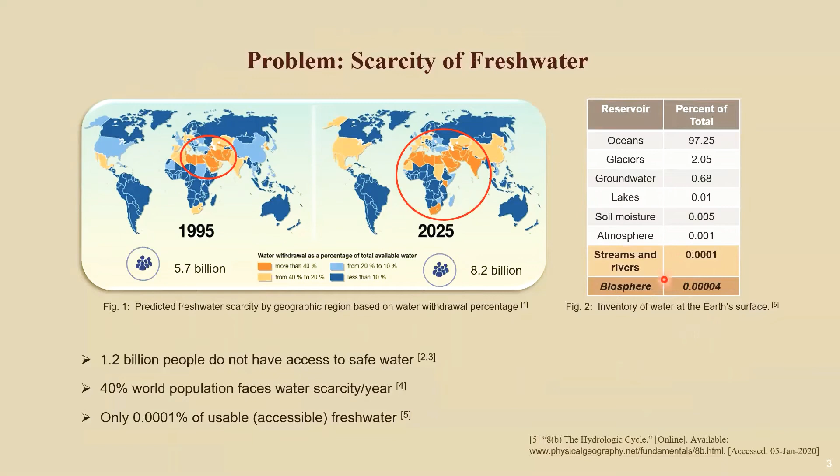Currently, 1.2 billion people do not have access to safe water. 40% of the world population faces water scarcity per year. The table on the right shows the inventory of water at Earth's surface, and a very tiny amount of total water is accessible to us for use.

Our focus in solving the water scarcity problem is to go off-grid. That means not connected to any supply water network system, especially for remote areas where people do not have access to safe water and the place is too far from developed areas to establish a water supply line.

So our first potential solution is the atmospheric water generator, or in short AWG. This is an off-grid source of water, free in the sense that the water generated by this device comes from the surrounding moisture in the air. This moisture comes from the biosphere due to evaporation in the water cycle. But this generation process can be energy intensive and inconsistent in nature due to variation in temperature and relative humidity in the atmosphere, as the amount of water production largely depends on these factors.

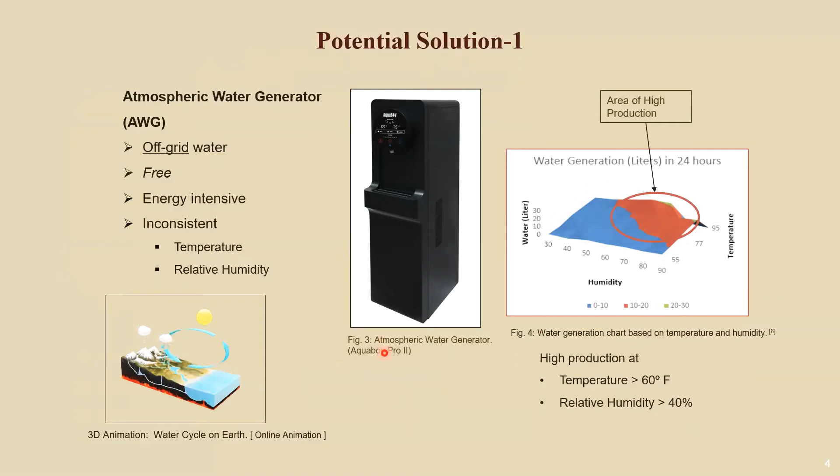The graph on the right shows this device can produce up to 30 liters of water when operated in the most favorable atmospheric condition. The most favorable condition is when temperature is above 60 degrees Fahrenheit and relative humidity is above 40%. This is a picture of the AquaBoy Pro atmospheric water generator that we used for this work.

The second potential solution is the rain harvesting system, or in short RHS. This is also independent of the supply water network, which makes it off-grid water. Free of cost in the sense that it is a natural phenomenon, but unpredictable as well, and the amount of rainfall is never constant. The system is pretty straightforward.

The rain falls on the catchment area and is collected in a reservoir, filtered, and then supplied to the user. Figure 5 shows the rainwater harvesting system at Freeman Center, San Marcos, Texas, which is our project site.

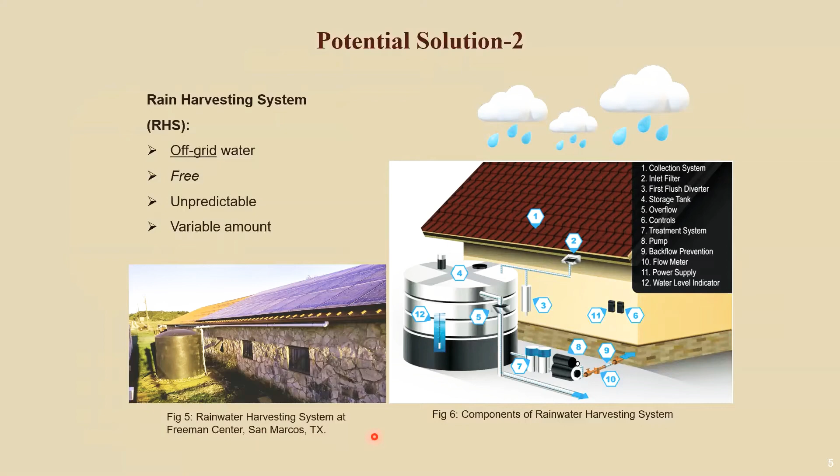Now, apart from having a water shortage, we also have a significant problem regarding the way water is consumed. Worldwide, about 70% of fresh water on average is used for agriculture. According to the World Bank Group data, there is an expectation of 50% increase in cultivated production and 15% increase in freshwater withdrawals for the increased population by 2050.

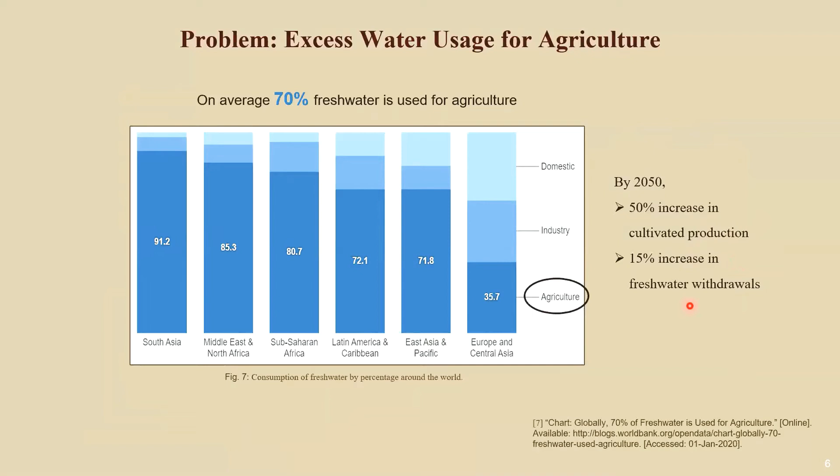A potential solution can be vertical farming, because this farming is developed in a controlled environment and does not require land. It can be established anywhere, even in remote areas. Hence, this can be called off-grid farming. It uses only 20% water compared to traditional farming because the water doesn't get lost by soil absorption.

This is actually hydroponic farming, which is placed vertically to utilize vertical space. A hydroponic system grows plants in nutrient solutions as shown in this figure. Some other benefits of this system are double growth rate, nutrition efficiency, fewer pesticides, etc.

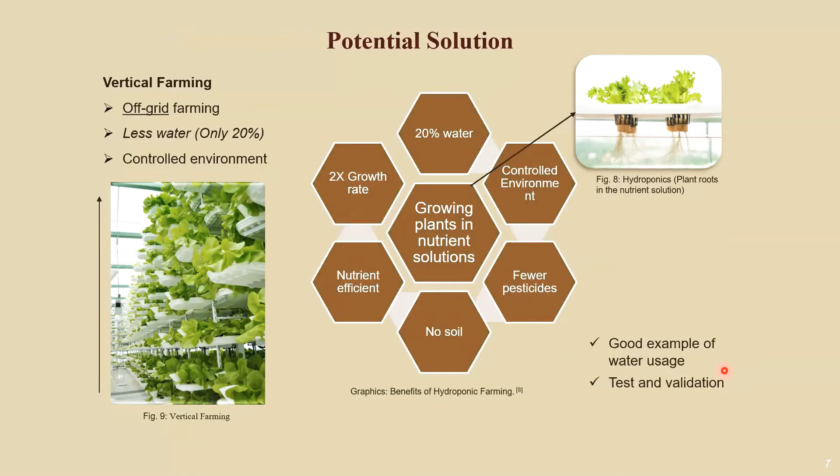This is a good example of continuous water demand, and that's why I decided to use the Evergreen project of vertical farming system as the application site for the smart integrated water system, and designed it accordingly.

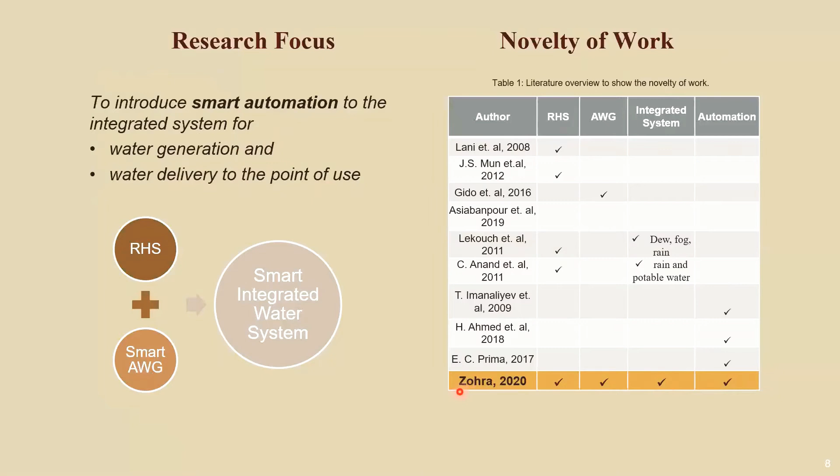My research focus is to introduce smart automation to the integrated system, which combines a rain harvesting system and smart AWG as a backup. This is done by auto-regulating water generation for the AWG and automatic refill of the nutrition supply tank on the delivery side. The table on the right shows the novelty of my work, where I integrated these two systems and implemented automatic control over them.

My methods and materials follow six steps: first, data analysis and concept integration; then drawing the 3D CAD model for better visualization; selecting electrical and mechanical components to be used for the automation; logic development for the Arduino controller; fabrication and connection; and finally experimentation and validation. I'll explain these steps on the following slides.

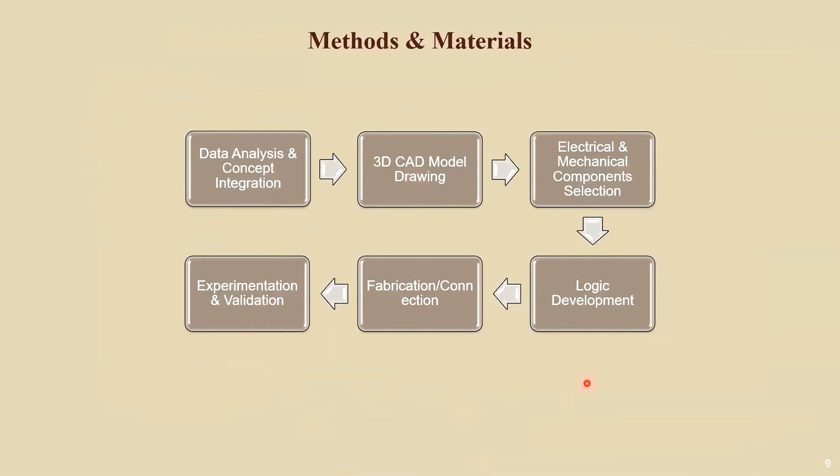The AWG is considered a smart AWG when it is turned on based on the following conditions: there is water demand, rainfall is below the historical average, and ambient conditions are feasible to run the atmospheric water generator. So the AWG in this integrated system works only as a backup for the rain harvesting system.

The reason is that rain provides a bigger amount of water, while AWG usually produces a very small amount by comparison. This can be designed based on demand and operational feasibility, which depends on temperature and relative humidity. The calculation of the coefficient of variation for this integrated system, 0.44, being less than 1, also confirms the consistency conclusion.

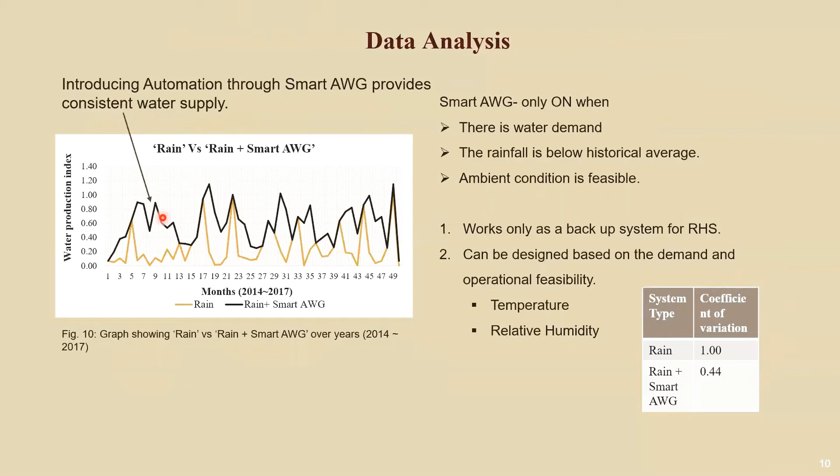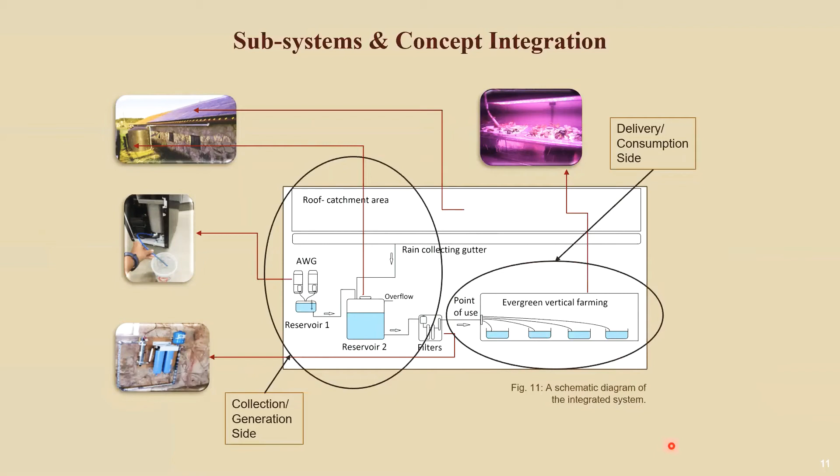This is the 3D CAD model that was drawn for a better visualization of the system.

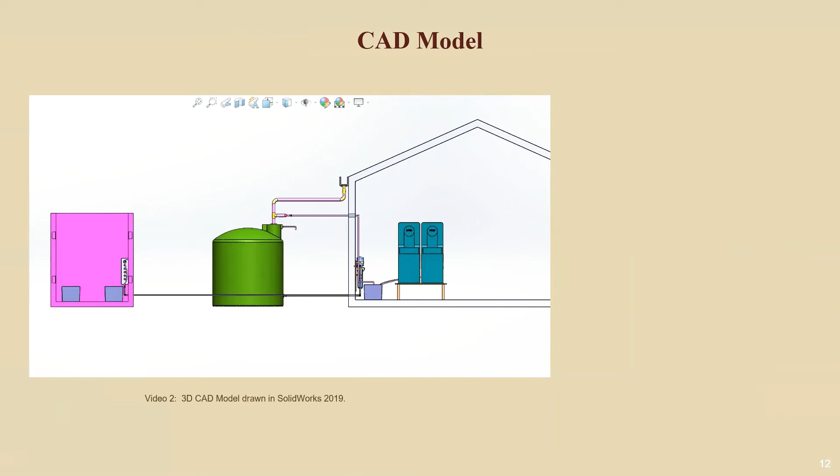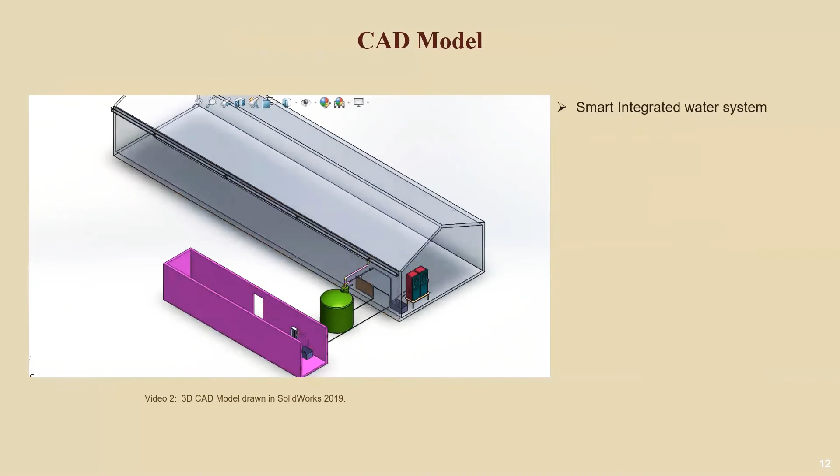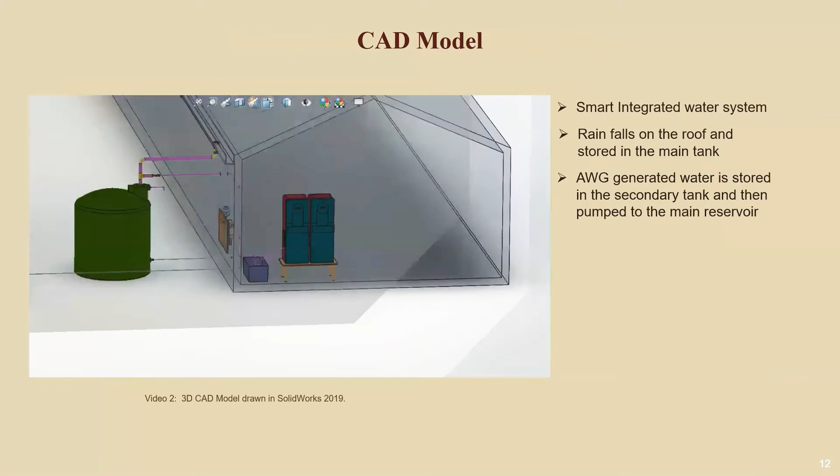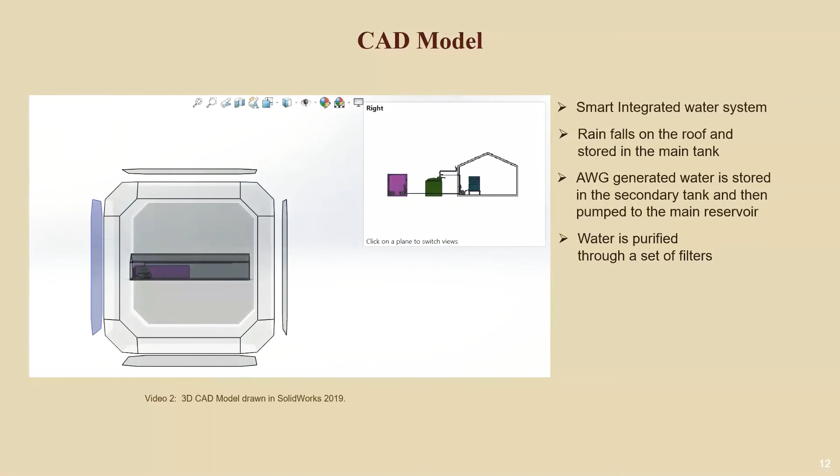This is the smart integrated system. You can see the complete fabrication and installation. This is the Evergreen site. Rain falls on the roof and is stored in the main tank. AWG-generated water is stored in the secondary tank and then pumped to the main reservoir. Water is purified through a set of filters so it can also be used for potable use. Finally, it is delivered to the supply tanks for nutrition solution to the vertical farming.

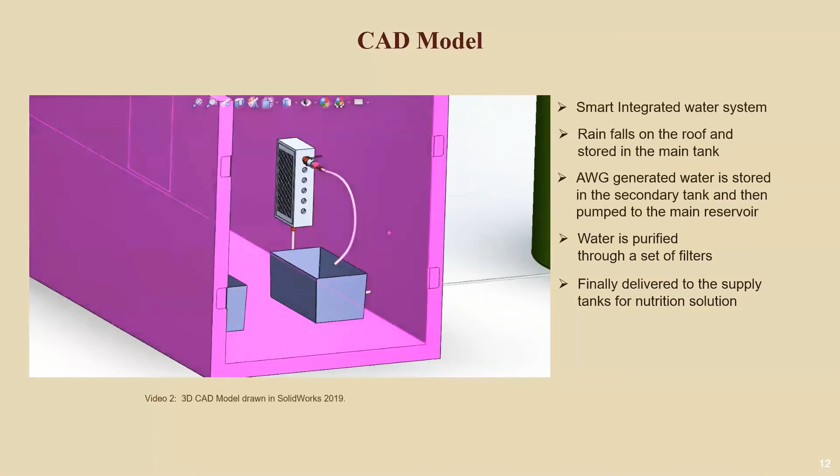Depending on the feedback, it decides whether to turn on the AWG or keep it off. Then it takes feedback from the float in the secondary reservoir, and if this tank is full from the water generated by the AWG, the Arduino turns on a small pump for 20 minutes to transfer this water into the primary reservoir.

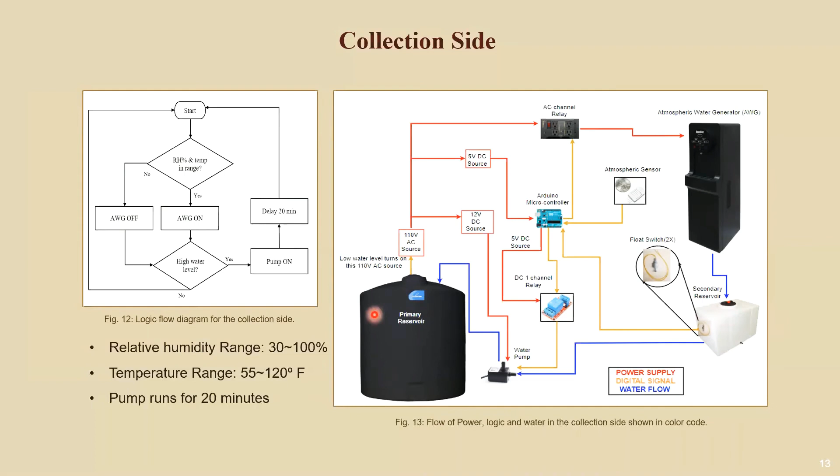The solenoid stays open for 5 minutes.

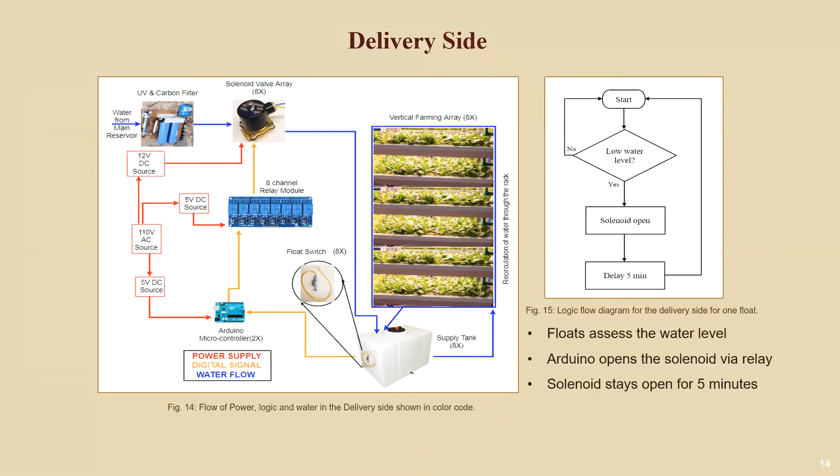Due to the COVID-19 pandemic situation, it was not possible to completely install this full automation on site. There is some work required related to infrastructure development and physical labor, such as lifting the AWG to higher positions, and water line installation from the distributor to the supply tank. However, this electrical system is completely tested in an experimental setup, and partially on site.

In the first video, one Arduino controls 4 floats and 4 relay switches, and these relay switches turn the solenoids on and off. The floats are numbered according to the pin numbers they're connected to on the Arduino board. For making a short video, instead of letting the solenoid run for 5 minutes, I did it for 5 seconds. In this video, you see no matter if one or multiple floats are sending a low water level signal, the logic works to open the respective solenoids.

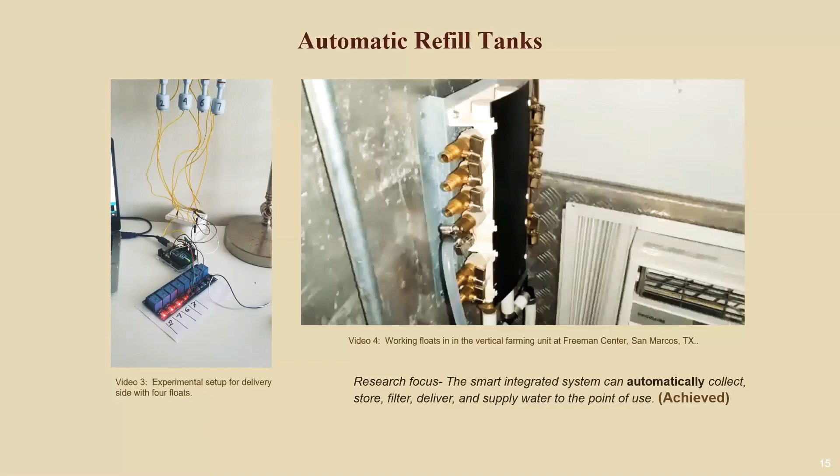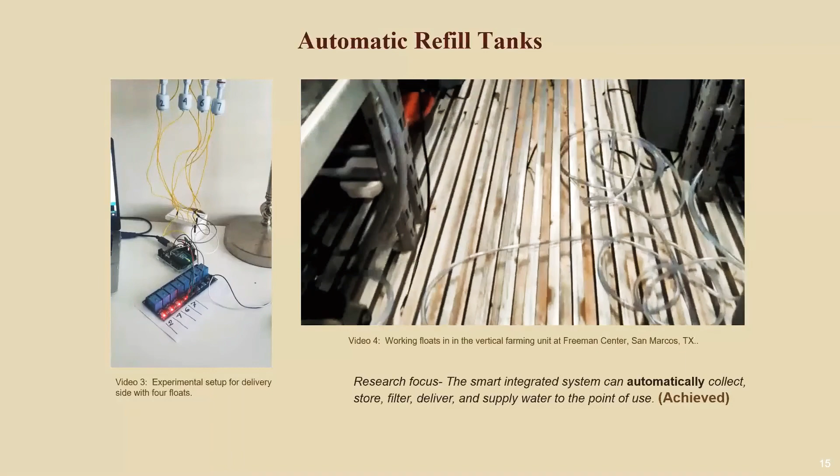In the second video, this whole setup from the first video was taken on site, and float 7 was installed in one of the supply tanks. A respective solenoid with water line connection was also established. This is the distributor line, and a flexible water pipeline was connected to the solenoid valve. Here it is, and the electrical connection was developed.

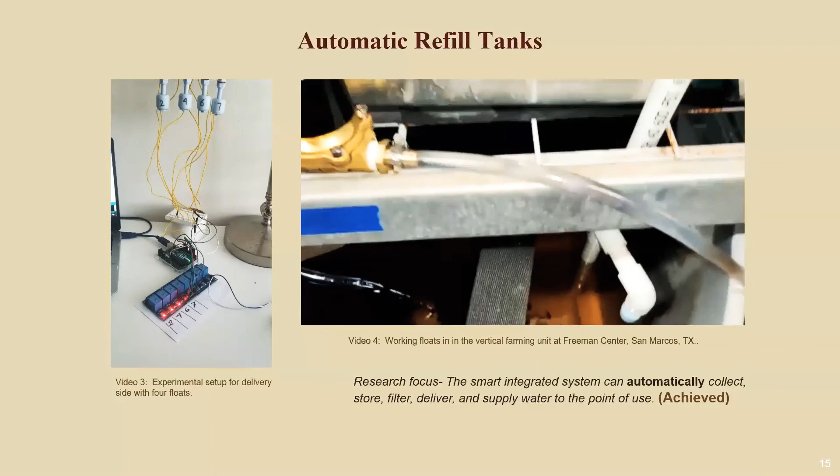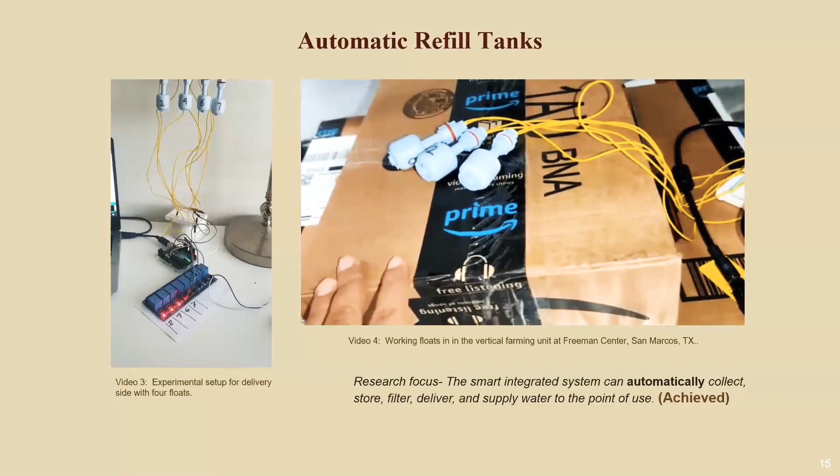Right now, float 7 is sending the signal of a low water level, so the switches are on. All other 3 floats are also sending the signal of low water level, so there are 4 switches on, and the water is flowing in to refill the tank.

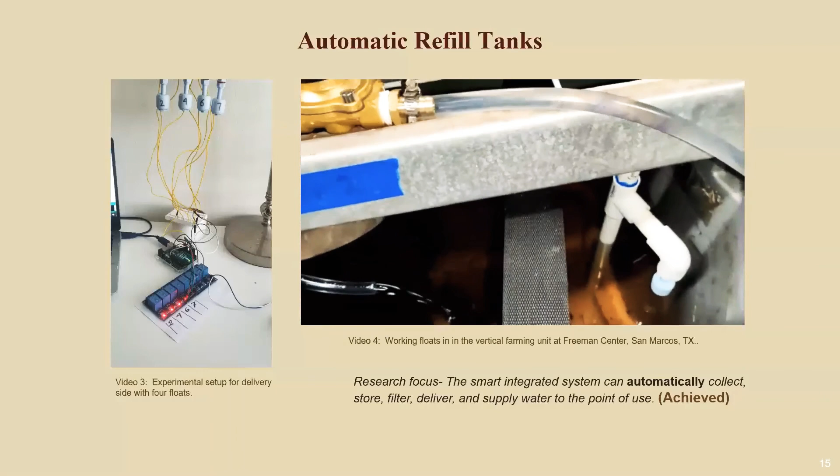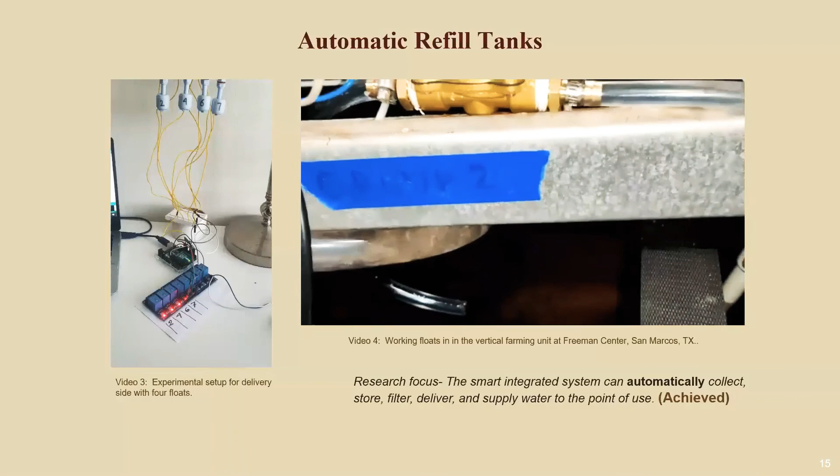To make the video short, I manually pull up the float switch to send a high level water signal, and the respective solenoid closes and the water stops coming in.

As a conclusion, I can say that areas with year-round extreme weather might not be suitable for this kind of integrated water system.

And we don't have control over collection of rain or generation of AWG water, but we can definitely control the operation of the system, which is introducing smart automation. This smart automation saves energy and labor, because otherwise someone has to stay on site to do all this operation. This also eliminates the necessity of extra electrical equipment, like the pump in the AWG to run. So it actually saves energy and money.

This is a potential water source for rural areas with water scarcity at comparatively lower cost. It has the flexibility to scale or adjust components based on the local area, rainfall, atmospheric condition, and type of application.